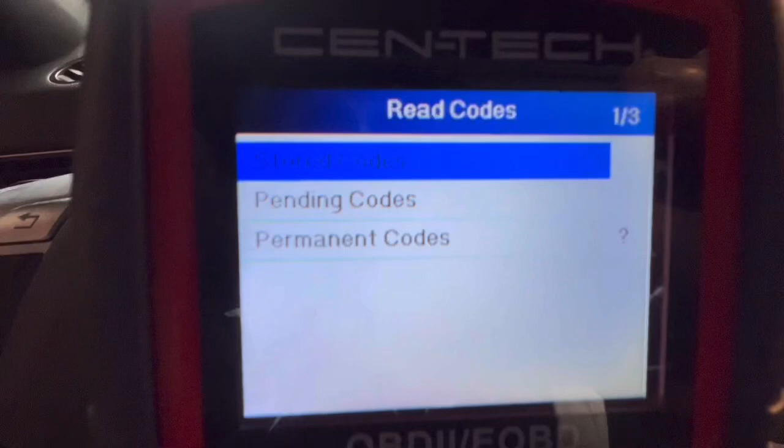Take forever, look. Okay, so I got my OBD2 scan tool right here, connected. The key on, so we're gonna read stored codes.

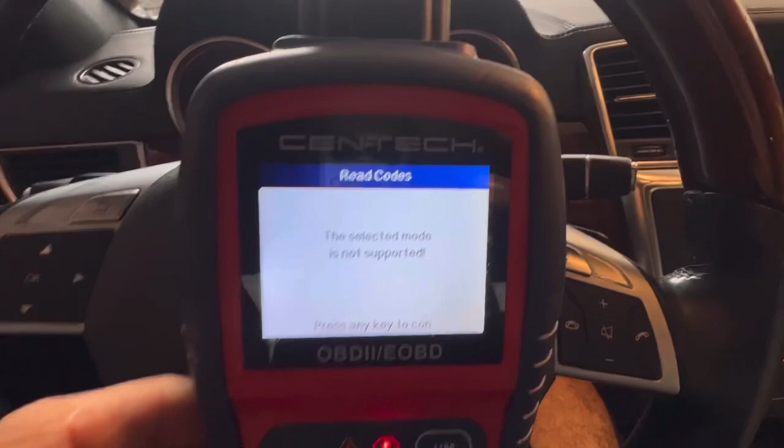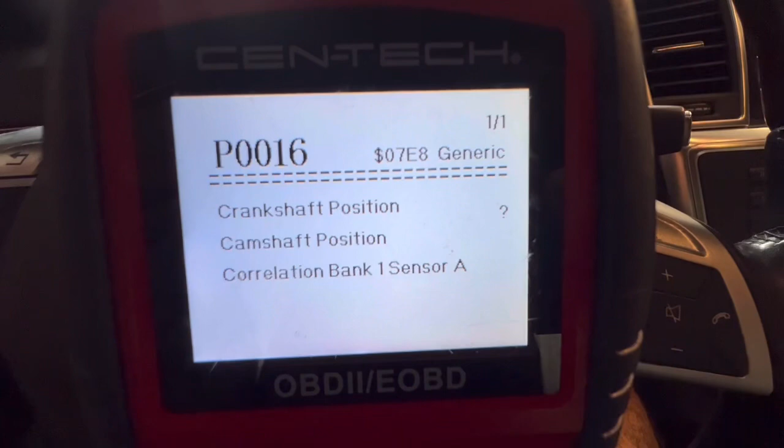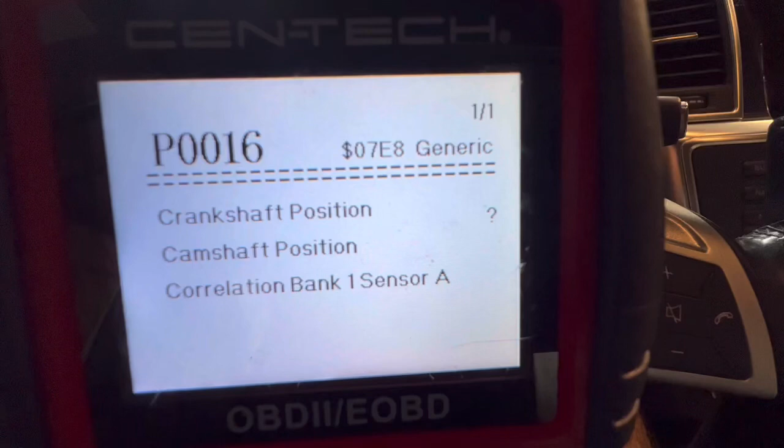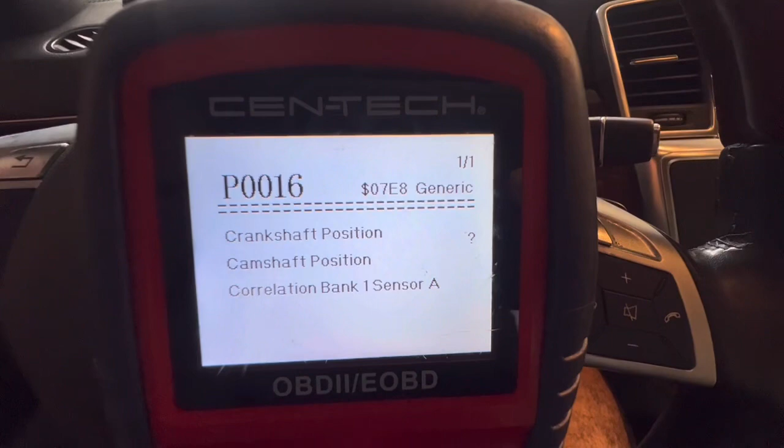Okay, so the issue is hard start, takes forever to start. This is the issue: P0016 camshaft position sensor, bank 1, sensor A. So we're gonna locate that sensor, replace it, and check the car after the replacement.

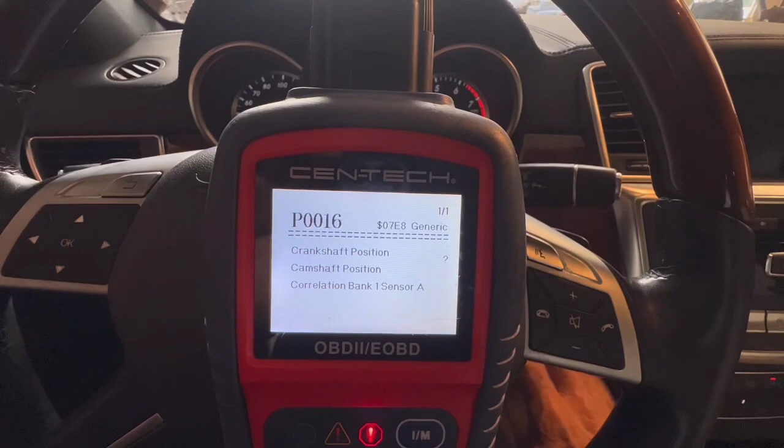So again, I'm gonna start it. So this is the vehicle, it's a hard start, and we already showed the codes. When you start the vehicle, it takes forever to start.

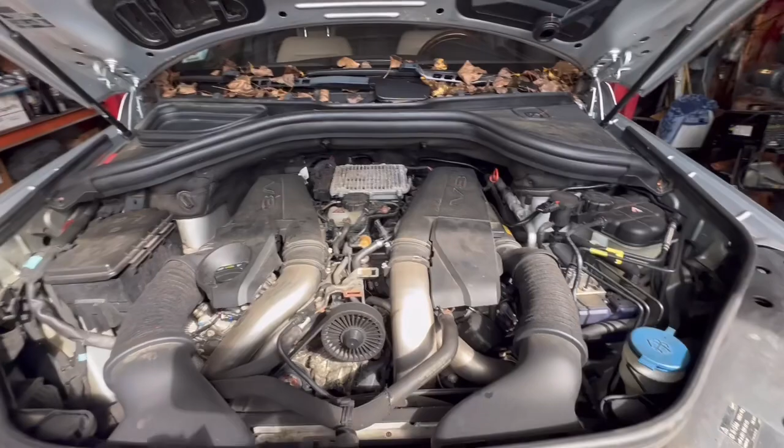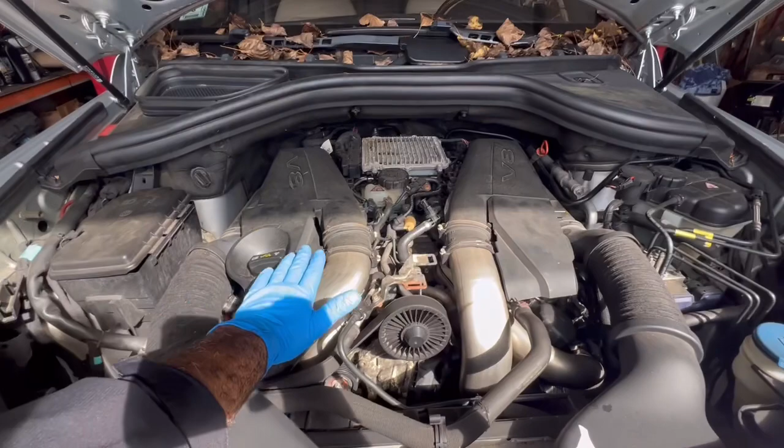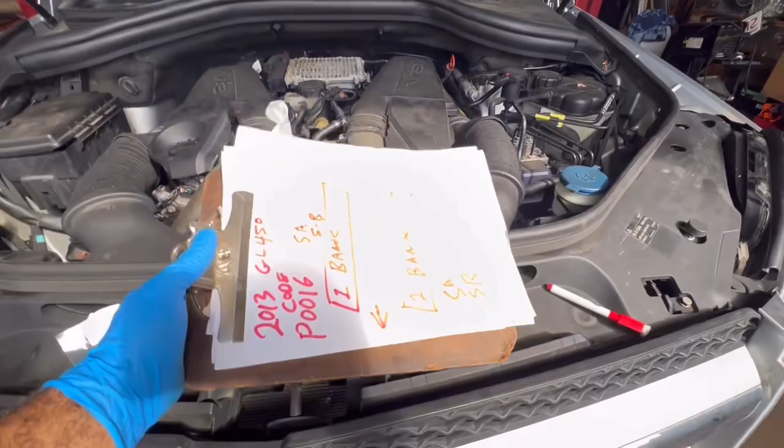Okay, so I'm gonna just share this information. You stay in front of the vehicle, okay, right here. Right side, where my hand is, was the oil cap, this is bank 1. Driver side here is bank 2, where the coolant or ABS pump is. So I made a little drawing, that way it's easier to understand.

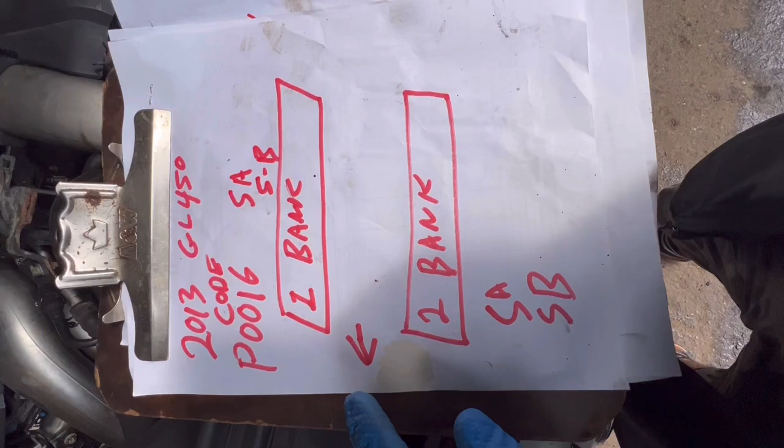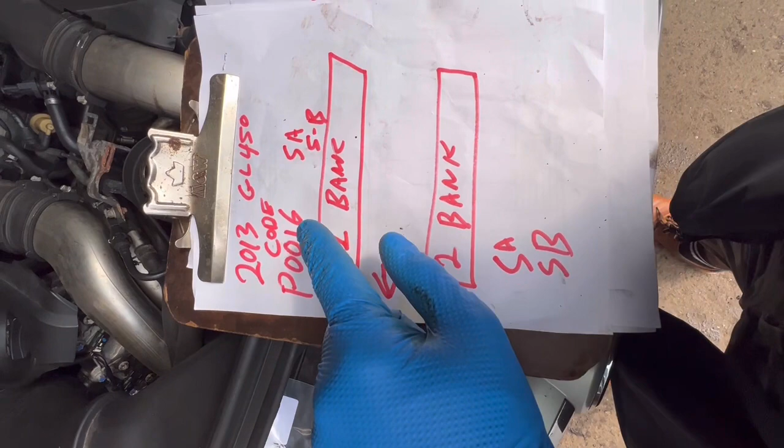So this vehicle came in for a hard start. We scanned it, I got a code P0016 for camshaft position sensor A. Each side has 2 sensors, all the same part number, so total 4 sensors.

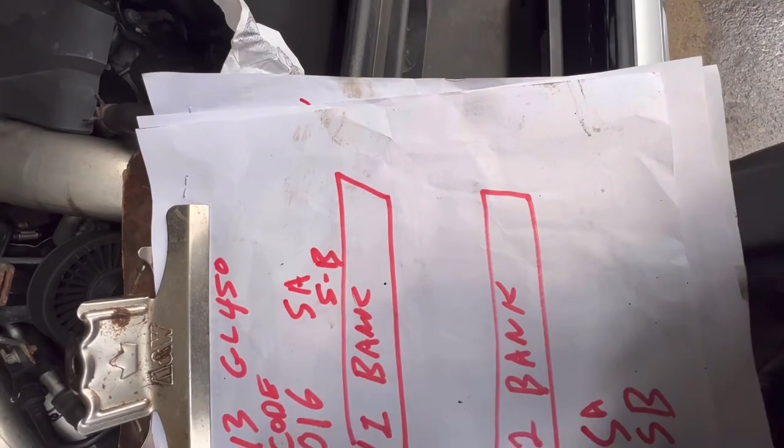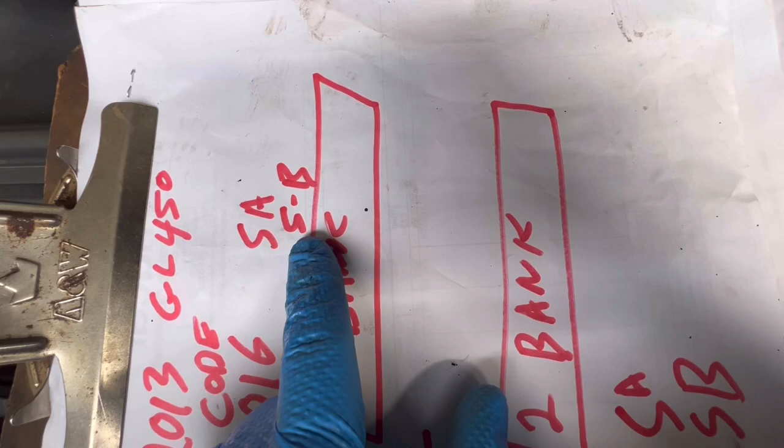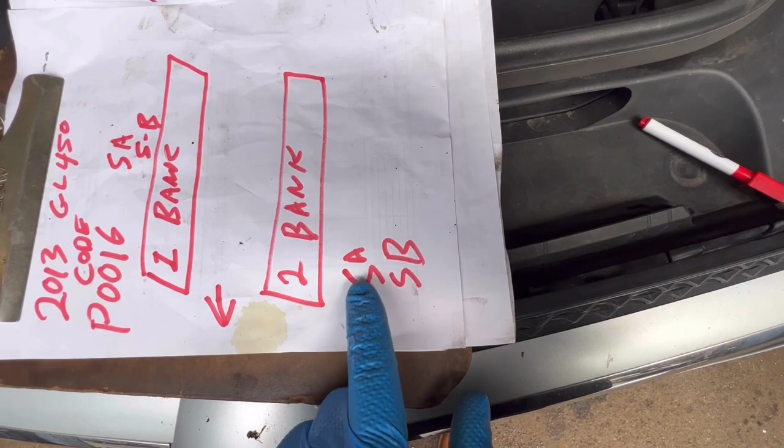So talking about bank 1, right side, the top one is sensor A, the bottom one is sensor B, for intake and exhaust. On the other side, same thing, top one is sensor A, bottom is sensor B. This is a 2013 GL, and from 2007 and up, I believe it's the same engine, V8.

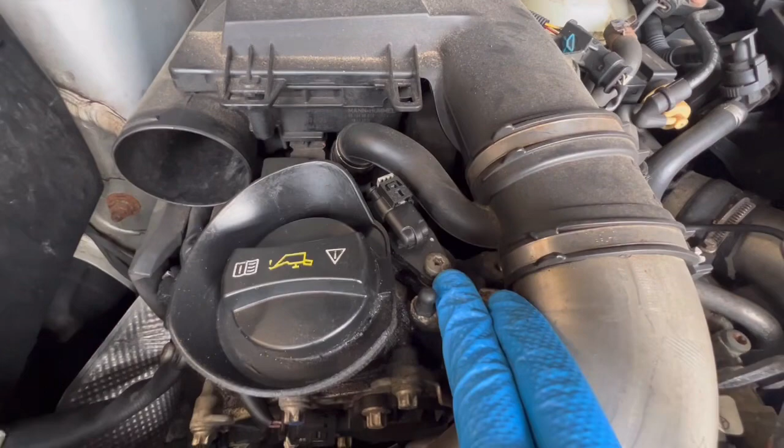So let's start working. First of all, we're gonna move this clip, this coupler clip out of the way. So this is the top one, sensor A, bank 1 sensor A, this side, right side. Bank 1 sensor B is right here, the lower one. Sensor B, sensor A.

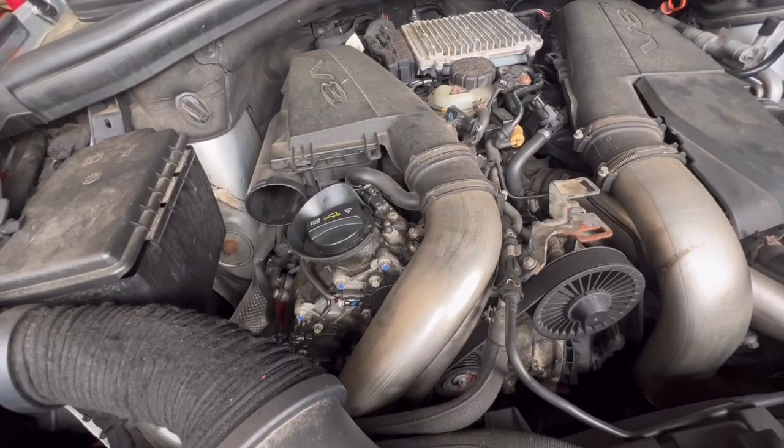Now, I ordered a new one, I have a new one, I got it from Mercedes. I'm gonna show the part number after. Okay, so it is there, the part number right here, but you can't see it, we'll share that. Okay, this is the tool, you take it out, you can loosen this just a tiny bit.

Okay, so I take it out by hand, and this is a little silver clip. Back it up with something like this, then you take the harness out. The little silver clip is a lock, when you put it back in, you just push it back in.

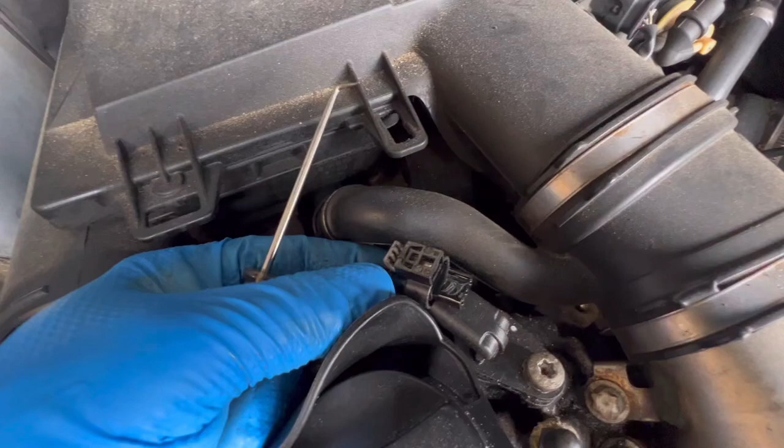Oh, you see this? See, leaking oil inside the harness, so the sensor is bad. It's just wear and tear. This vehicle has 163,000 miles, I don't blame it, it's still working.

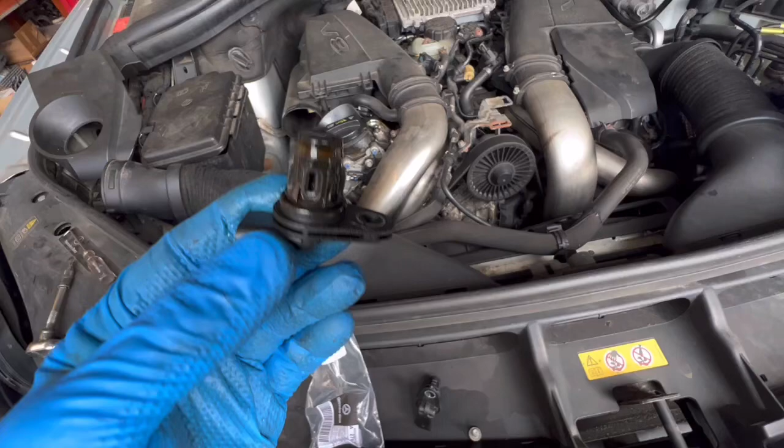So take the sensor out. If you have a vehicle you don't want to sell, I recommend doing all 4 of them. We're just doing the one that's broken now. See this? It's the same sensor.

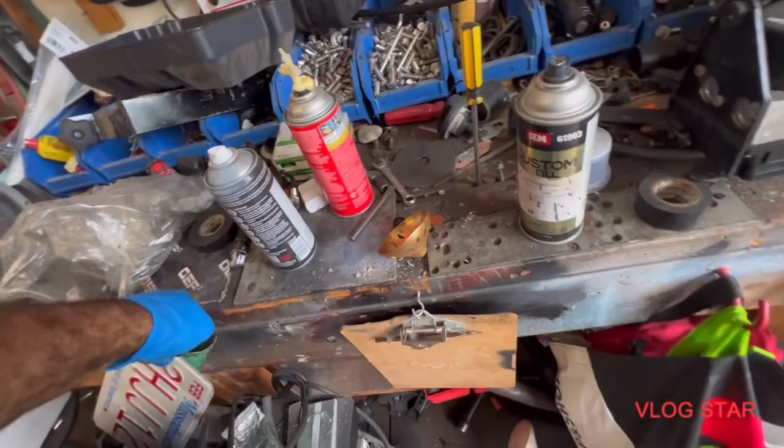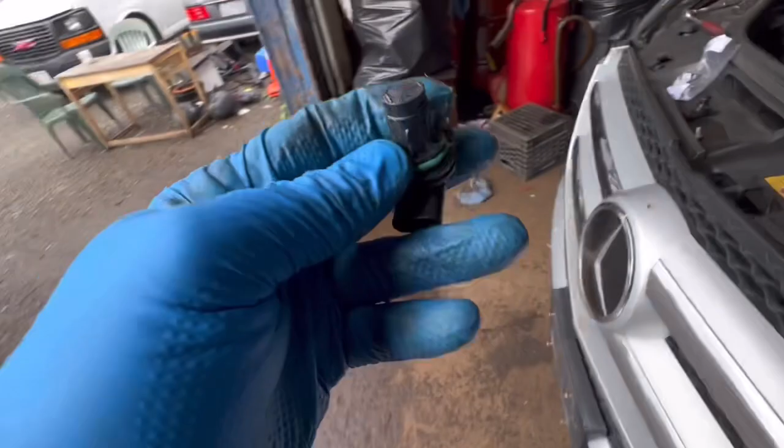Okay, let's clean here. It's gonna get some grease here on the O-rings, just get some grease. See, there's grease here. Okay, little grease, that way it's good. So I'm gonna clean this here.

Okay, so like I said, new one, old one. Gonna go in, see, by hand. I'm gonna put this back. This is aluminum, the block, so the valve cover, just do not over-tighten it, just hand tight, even this one, hand tight, okay?

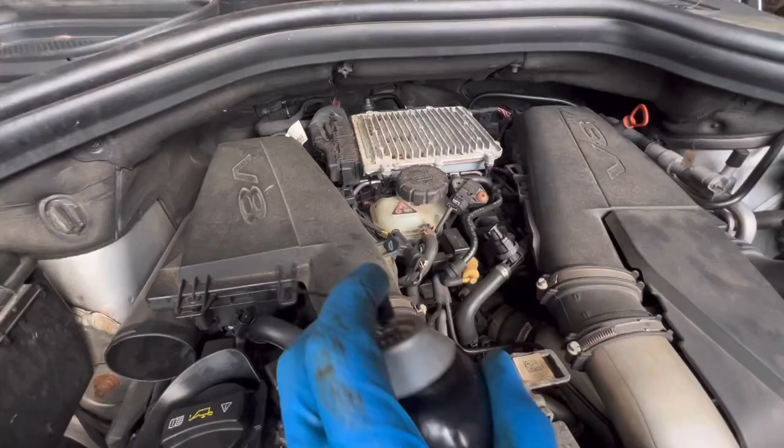So now, you see the oil inside this harness? We're gonna clean it up, okay. If you have brake cleaner, we'll do it. I'm gonna find the brake cleaner. There's the brake cleaner. Just clean it up.

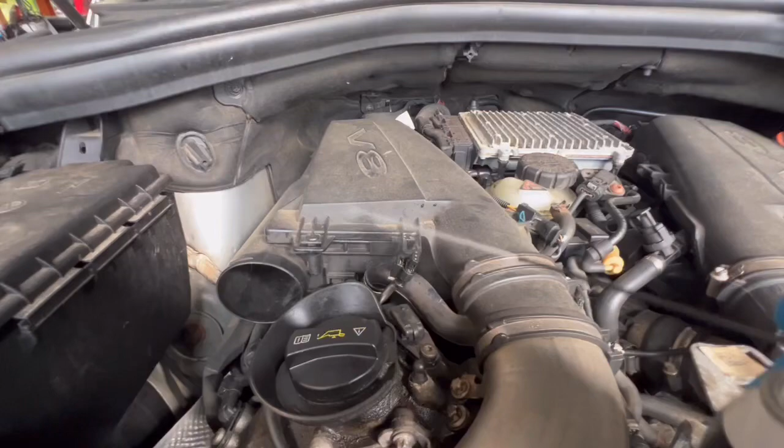Now it's a little dirty. So I recommend you change the oil after this job, you know.

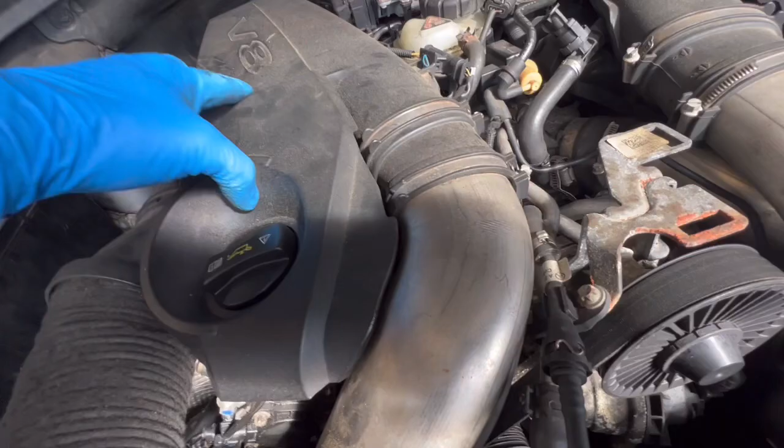Nice and clean. See the clip? You just put this back. Okay, so we're gonna put this, this is another, just push, click on. Okay, and I'm sure I'm gonna change the oil, I don't want to leave it like this because it seems dirty, look.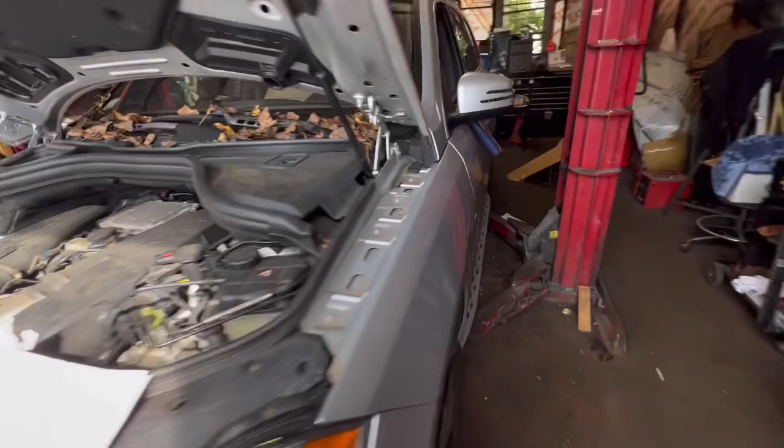Okay, let's start it up. I still have my scan tool here, again this is the code: camshaft position, bank 1 sensor A.

So let's try it again. This is a beautiful Mercedes.

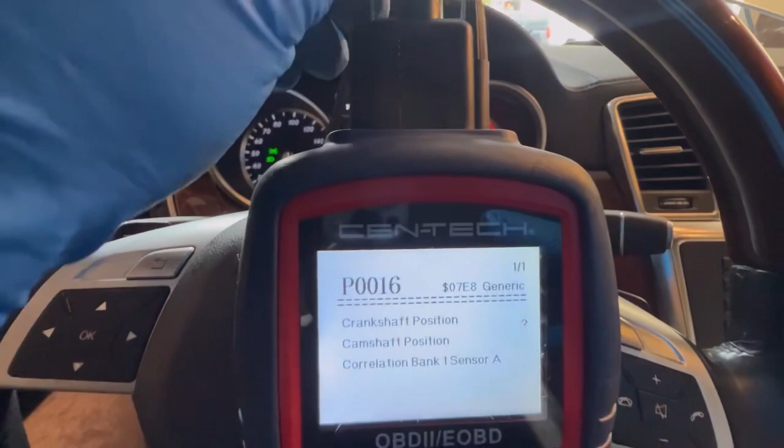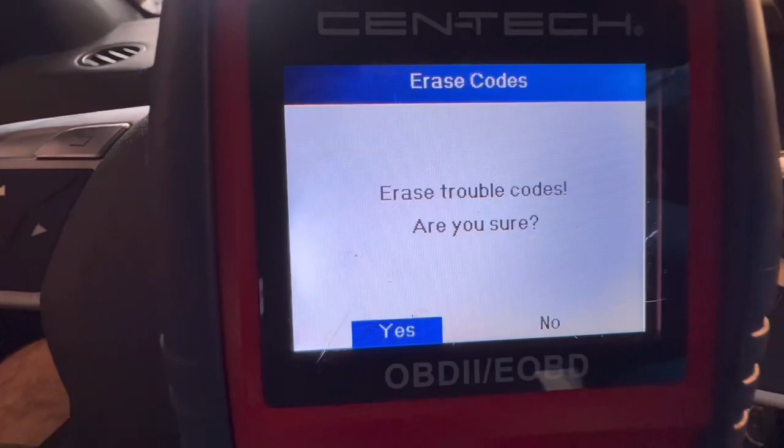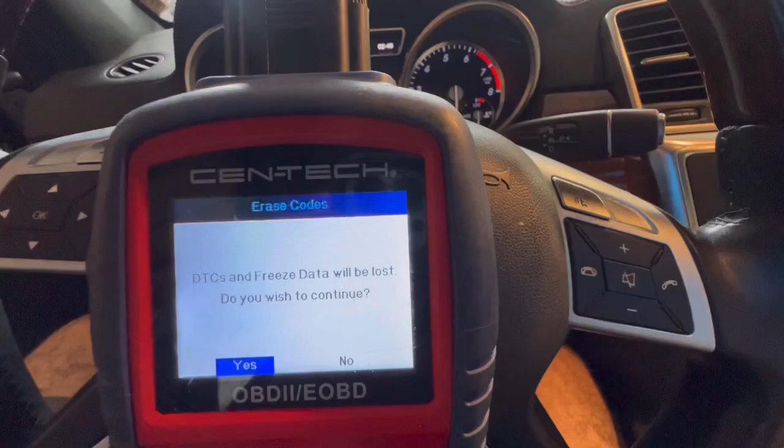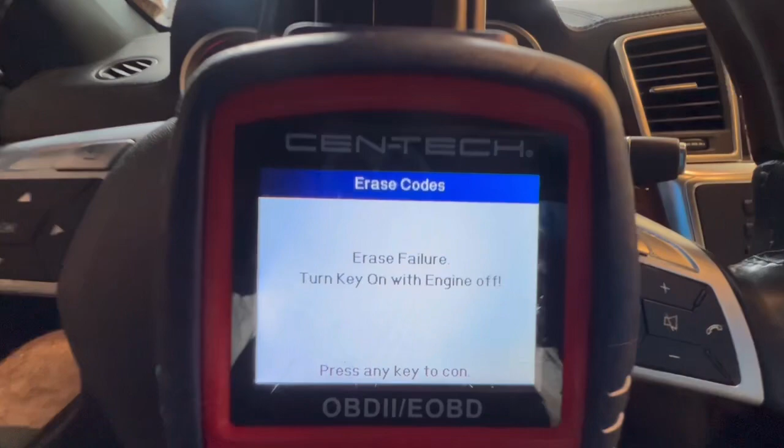Okay, this is all set. Now I'm gonna clear the check engine light. Clear, yes, erase, yes. Okay, all clear.

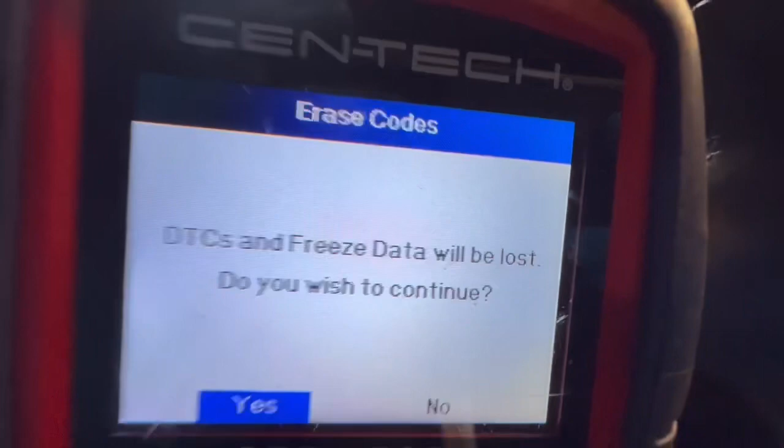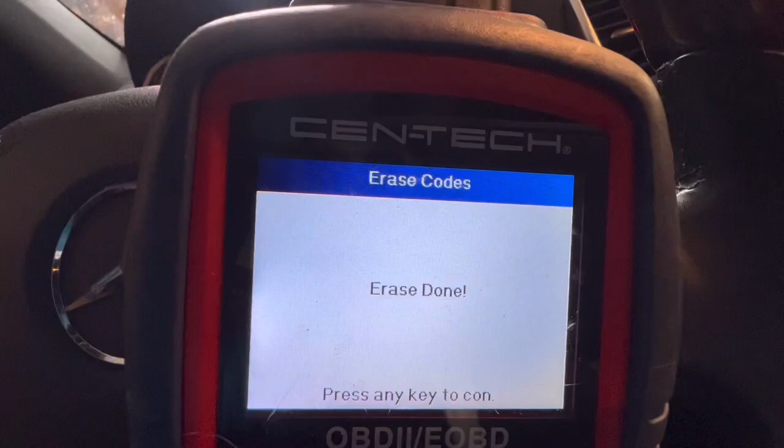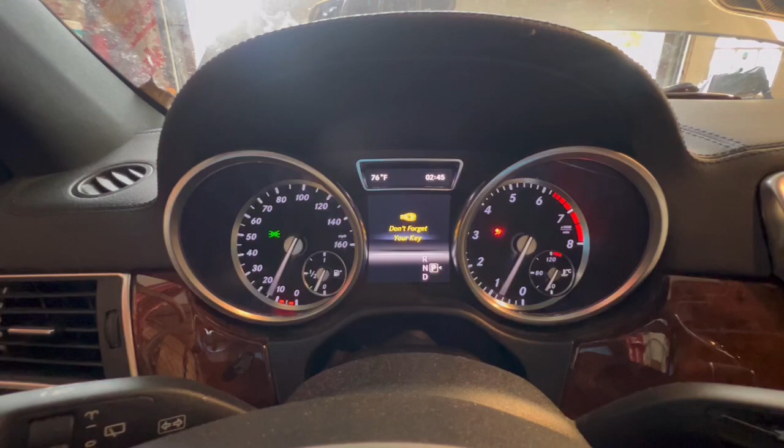Just waiting for it to clear, erase is done, look. So that's what we're waiting for, just wait here. No more check engine light. You're gonna start it, starts right up. One more time. Wow, this little sensor caused a lot of trouble. Look, one more time.

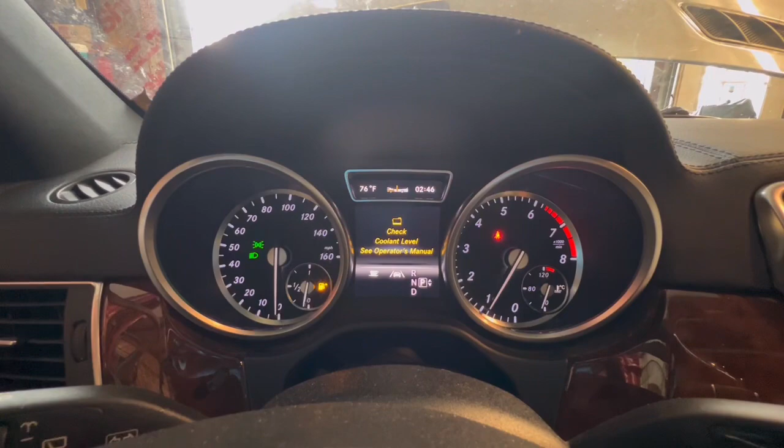Thank you for watching. I hope my video is helpful for any Mercedes owner. It's a similar problem for all the Mercedes, they have two camshafts.